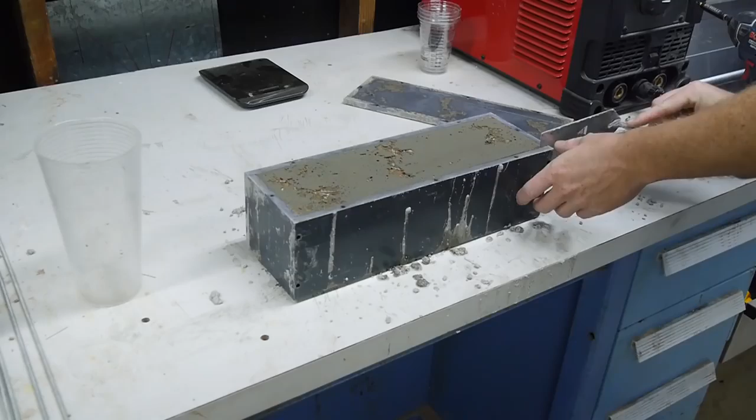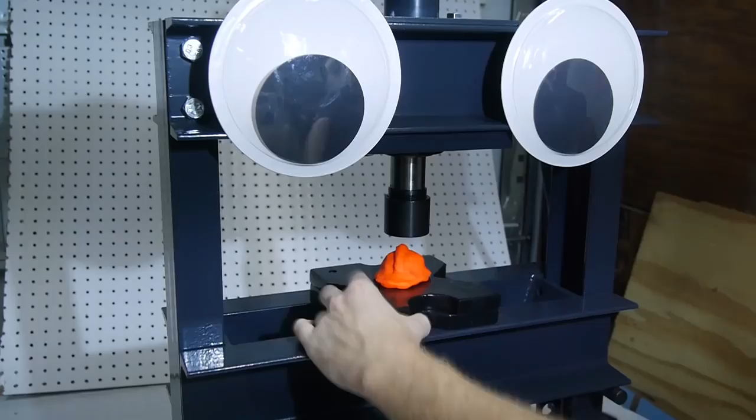More on that later. To understand concrete's greatest weakness, first we need to know a little bit about mechanics of materials, which is the fancy way of saying how materials behave under stress. Stress in this case is not referring to anxiety or existential dread, but rather the internal forces of the material.

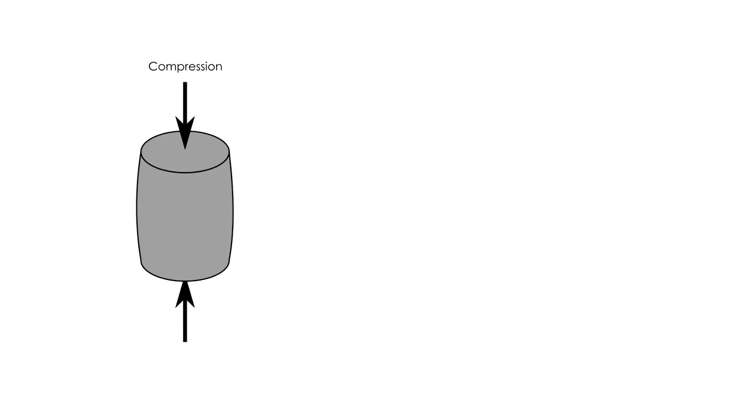There are three fundamental types of stress: compression, pushing together, tension, pulling apart, and shear, sliding along a line or plane. And not all materials can resist each type of stress equally. It turns out that concrete is very strong in compression and weak in tension. But you don't have to take my word for it.

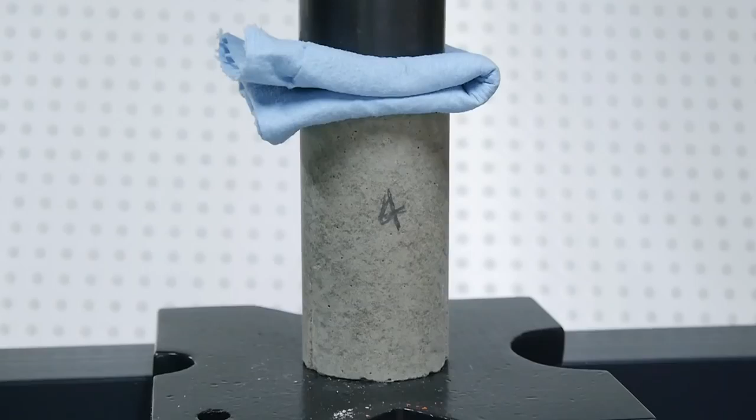Here's a demonstration. These two concrete cylinders were cast from the exact same batch, and we'll see just how much load they can withstand before failure. First, the compressive test. Under compression, the cylinder broke at a load of about 1,000 pounds. That's 450 kilo. For concrete, that's pretty low because I included a lot of water in this mix.

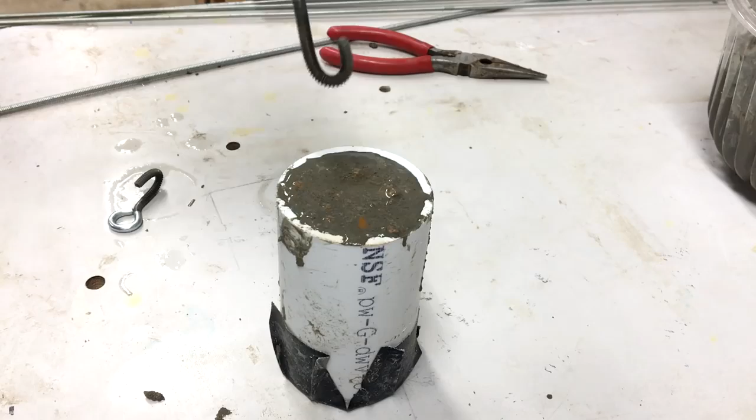The reason is my rig to test tensile strength isn't quite as sophisticated. I cast some eye bolts into the sample and now I'm hanging it from the rafters in the shop. I filled up this bucket with gravel, but it wasn't quite enough weight to fail the sample. So I added another dumbbell to push it over the edge.

The weight of this bucket was only about 80 pounds, or 36 kilos. That's less than 10% of the compressive strength. All this to say, you shouldn't make a rope out of concrete. In fact, without some way to fix this weakness to tensile stress, you shouldn't make any kind of structural member out of concrete, because rarely does a structural member experience just compression.

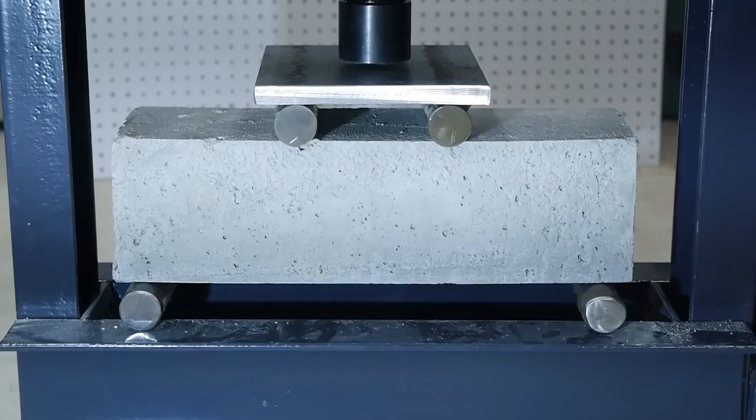In reality, almost all structures experience a mixture of stresses. That's no more apparent than in the classic beam. This particular classic beam is homemade by me out of pure concrete here in my garage. Applying a force on this beam causes internal stresses to develop, and here's what they look like. The top of the beam experiences compressive stress, and the bottom of the beam experiences tensile stress.

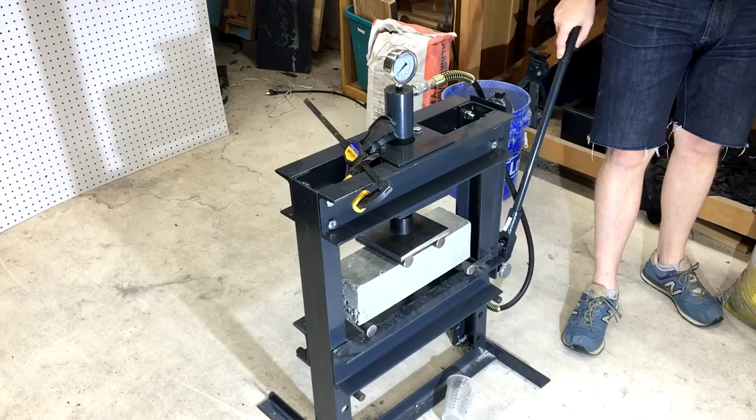You can probably guess where the failure is going to occur on this concrete beam, as I continue to increase the load. It happens almost instantly, but you can see that the crack forms on the bottom of the beam where tensile stress is highest and propagates upward until the beam fails.

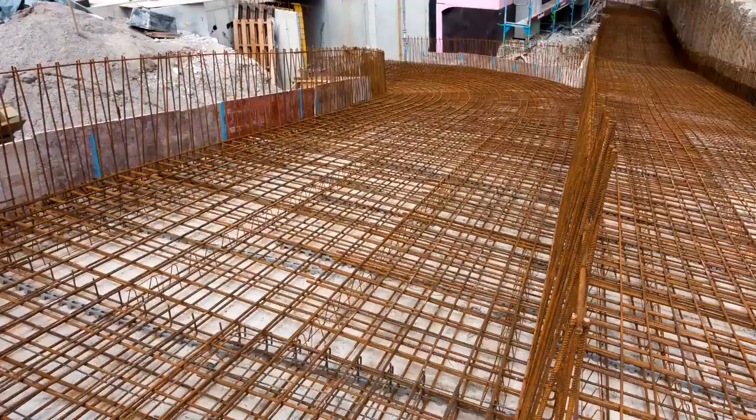You see what I'm getting at here? Concrete on its own does not make a good structural material. There are just too many sources of tension that it can't resist by itself. So in most situations, we add reinforcement to improve its strength. Reinforcement within concrete creates a composite material, with the concrete providing strength against compressive stress, while the reinforcement provides strength against tensile stress.

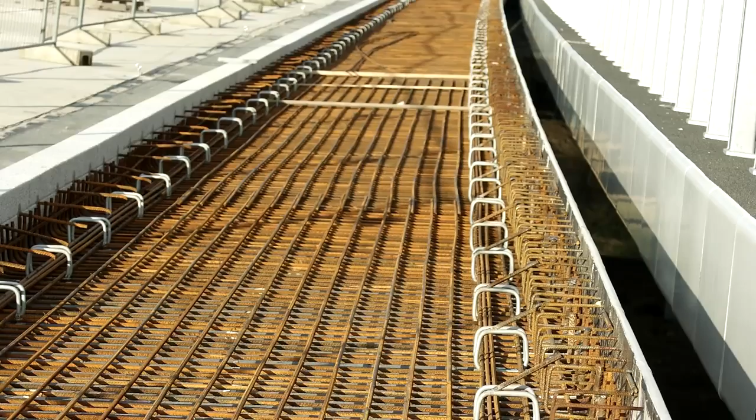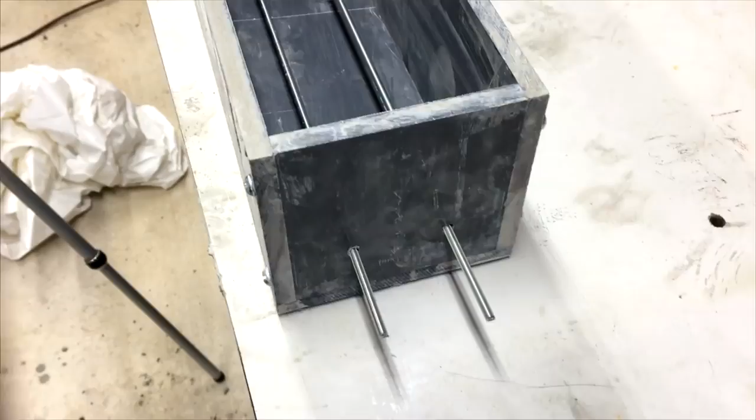And the most common type of reinforcement used in concrete is deformed steel, more commonly known as rebar. I made a new beam with a couple of steel threaded rods cast into the lower portion of the concrete. These threads should act just like the deformed ridges in normal rebar to create some grip between the concrete and steel.

Under the press, the first thing you notice is that this beam is much stronger than the previous one. We're already well above the force that failed the unreinforced sample. But the second thing you notice is that the failure happens a little bit slower. You can easily see the crack forming and propagating before the beam fails.

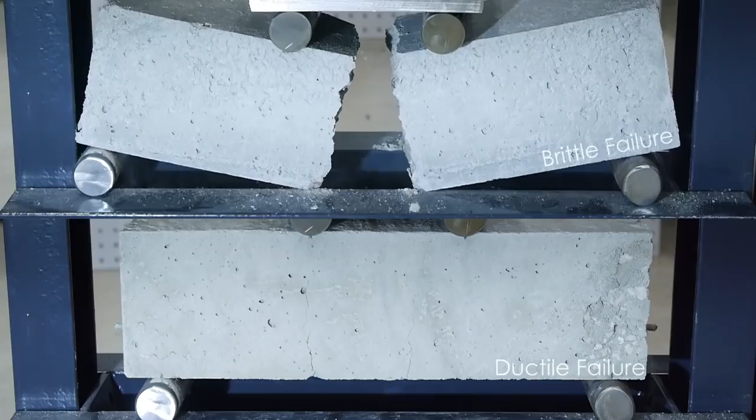This is actually a very important part of reinforcing concrete with steel. It changes the type of failure from a brittle mode, where there's no warning that anything is wrong, to a ductile mode, where you can see the cracks forming before a complete loss of strength. This gives you a chance to recognize a potential catastrophe and hopefully address it before it occurs.

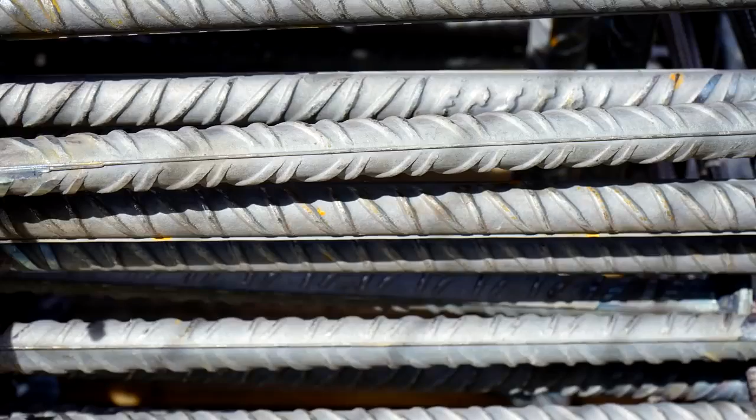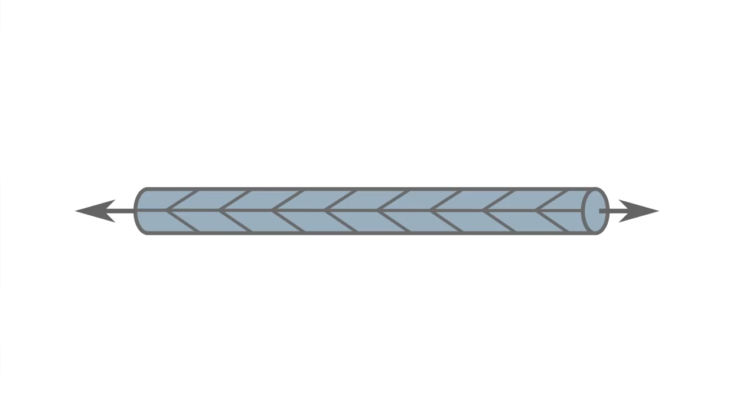Rebar works great for most reinforcement situations. It's relatively cheap, well tested, and understood, but it does have a few disadvantages. One of the major ones being that it is a passive reinforcement. Steel lengthens with stress, so rebar can't start working to help resist tension until it's had a chance to stretch out. Often that means that concrete has to crack before the rebar can take up any of the tensile stress of the member.

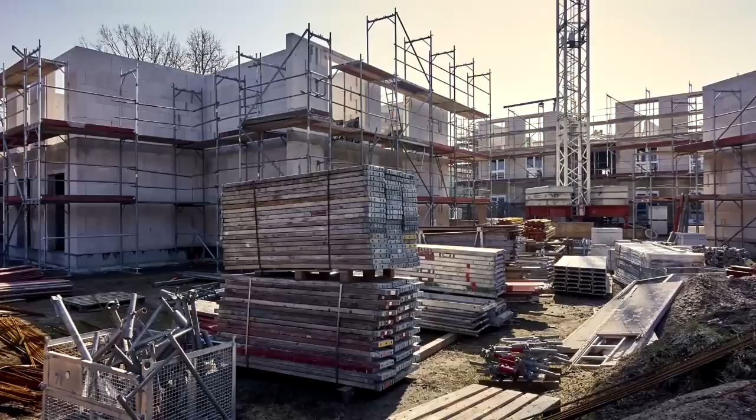Cracking of concrete isn't necessarily bad. After all, we're only asking the concrete to resist compressive forces, which it can do just fine with cracks. But there are some cases where you want to avoid cracks, or the excessive deflection that can come from passive rebar. For those cases, you might consider going to an active reinforcement, also known as pre-stressed concrete.

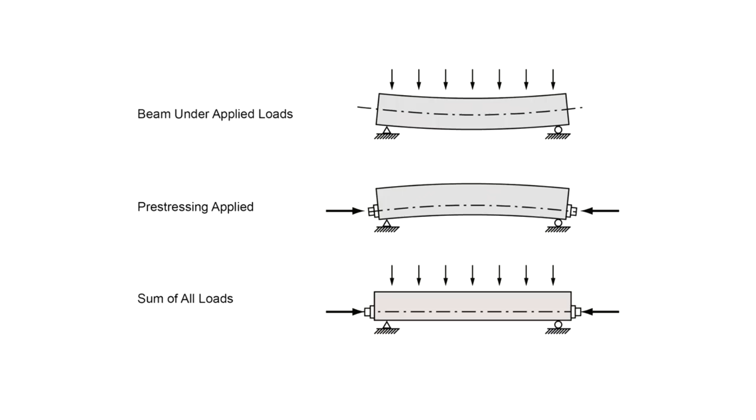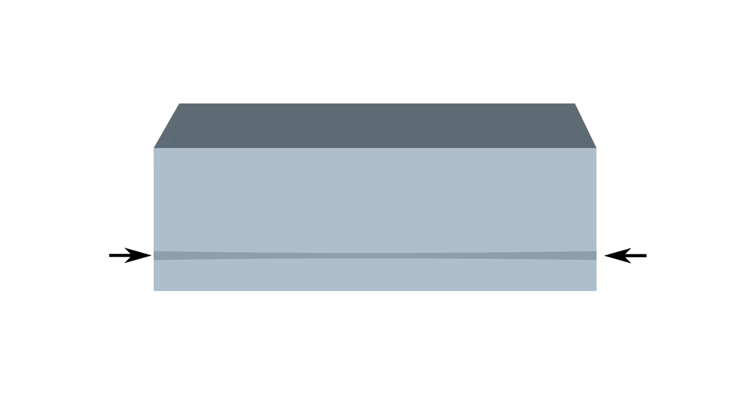Pre-stressing means applying a stress to the reinforcement before the concrete is placed into service. One way to do this is to put tension on the steel reinforcement tendons as the concrete is cast. Once the concrete cures, the tension will remain inside, transferring a compressive stress to the concrete through friction with the reinforcement. Most concrete bridge beams are pre-stressed in this way. Check out all that reinforcement at the bottom of this beam.

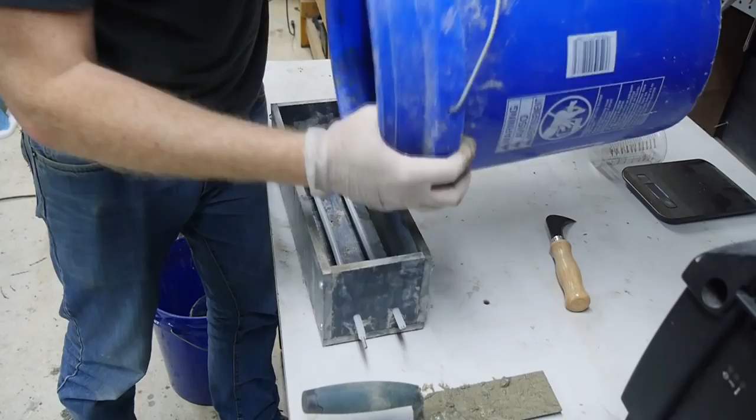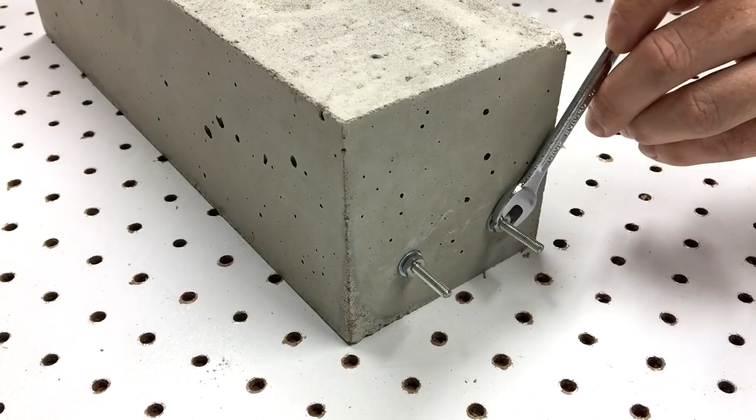Another way to pre-stress reinforcement is called post-tensioning. In this method, the stress in the reinforcement is developed after the concrete is cured. For this next sample, I cast plastic sleeves into the concrete. The steel rods can slide smoothly in these sleeves. Once the beam cured, I tightened nuts onto the rods to tension them.

Under the press, this beam wasn't any stronger than the conventionally reinforced beam, but it did take more pressure before the cracks formed. Also, this one wasn't quite as dramatic because instead of failing the actual steel rods, it was the threads on the nuts that failed first.

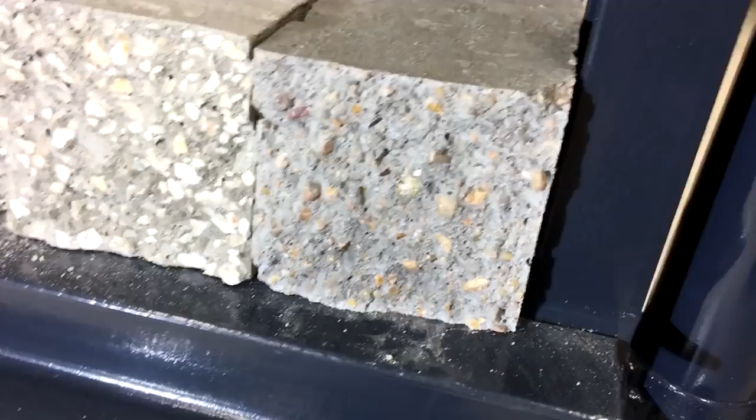I hope these demonstrations help show why reinforcement is necessary in most applications of concrete, to add tensile strength and to change the failure mode from brittle to ductile. Just like the last video, I'm just scratching the surface of a very complicated and detailed topic. Many engineers spend their entire careers studying and designing reinforced concrete structures. But I'm having some fun playing with concrete, and I hope you're finding it interesting.